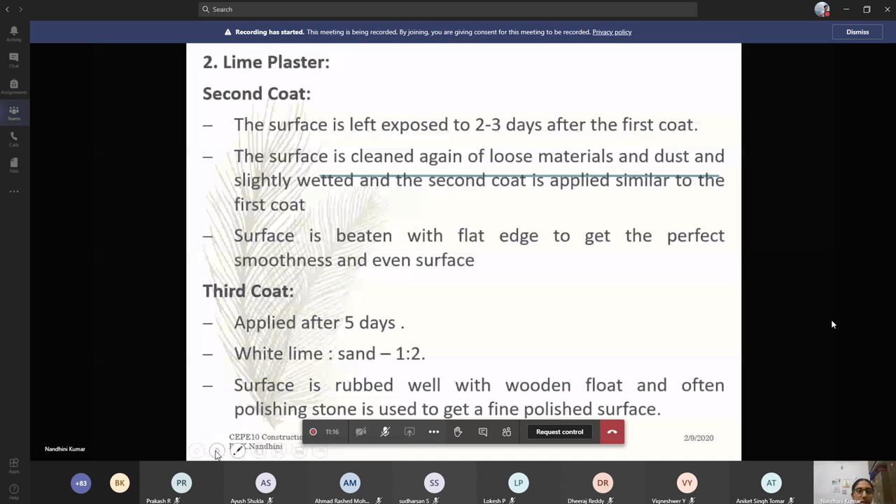Next is the cement plastering and cement lime plastering. For cement plastering, generally two coats are provided. This is generally used in low cost building materials - for low cost, you go only for a single coat.

The types of plaster finishes - you might have seen your bedrooms are a little smoother, and the external is a little rough. Did you all check it in your house? Did anyone check? Yes ma'am, how was it? Was it all the same? Yes ma'am, they were quite the same. Did anyone find any difference?

Outside was rough, ma'am, the outside was rough, the inside was very smooth. We'll see the reason for that in the upcoming slides.

This is the smooth cast plaster finish. In this finish, the surface will be very smooth and soft. The mortar for this finish may be made up of cement and fine sand - since you need a very fine coating, you'll use cement as the particle size is very less, and also very fine sand. The mortar is applied with the help of the wooden float.

With the help of the wooden float, you'll have a rectangular type wooden float that the mason will be holding, taking it to the top and bottom to make it into a smooth finish.

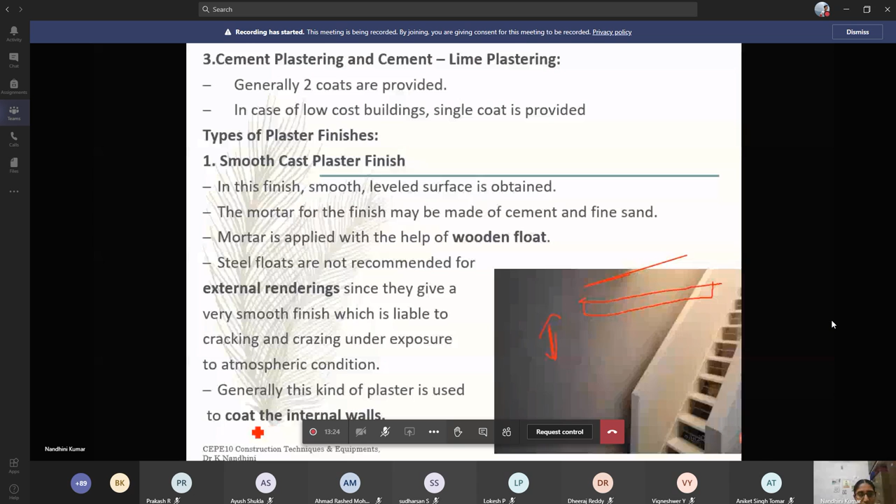Generally, this kind of plaster is used to coat the internal walls. Rough plaster finishing - this plaster is a mixture of sand and gravel, which is covered on the freshly plastered surfaces. This is rough cast plaster. Have you seen this type in any newly constructed buildings?

This is also known as Spartan dash finish, a very rough finish. This will be provided mostly in industrial exposed buildings or heavy structures where heavy handling of equipment or industrial or factory related activities are done. For that, the outer or inner plastering will be very rough.

Mortar used to get the rough cast finish consists of coarse aggregate, minimum 3 to 12 mm size, along with cement and sand. The proportion of one part coarse aggregate, 1.5 parts cement, and 3 parts sand is mixed, and that is applied.

A large quantity of mortar is taken using the trowel. You mix the mortar, take it with the trowel, and then dash it against the wall. It gets stuck to it, and then you level it using a wooden float.

Generally, this type of plaster finish is preferred for external renderings, that is the external portion of your building, because it is waterproof, durable, and resistant to cracking.

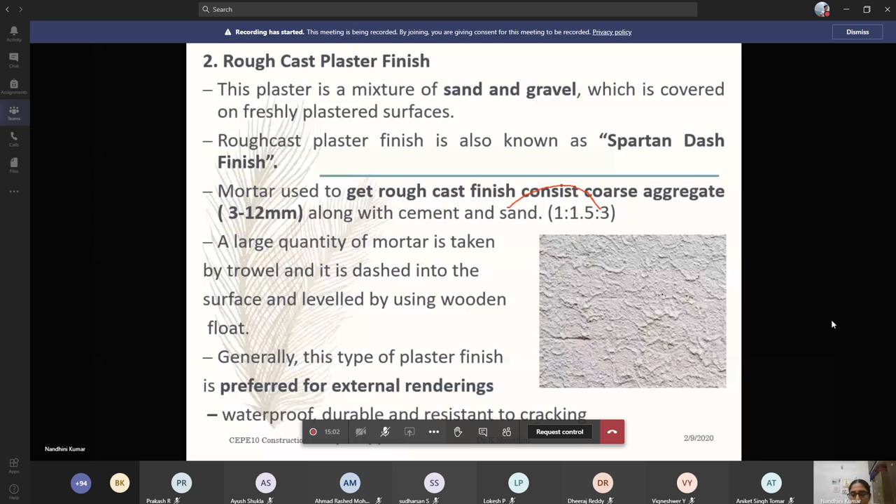Sand-faced plaster finish. Have you seen this type in the internal walls? When people are constructing internal walls, smooth sand and cement slurry will be used for this mortar.

Sand-faced plaster is a layer of cement sand mortar applied on the brickwork, and it also serves as a damp-proof coat. The main purpose is damp-proofing, so water should not penetrate into it. That is the reason. If it is closely packed, then water will not penetrate through it.

This type of plaster is used to give a finishing touch to the surface on the walls, like your internal walls, or any part of the building, maybe rooms or partition walls. Over this, you can coat it with many colors, or that is left up to you, for the outer plastering and preliminary coatings.

To some extent, they serve as sound and thermal insulation material. A sponge is used on the second coat when it is wet, to remove the extra dust, before going for the outer coating of paint, like sand grain, making the surface equal and uniform.

These plasters are used to reduce cracking and crazing. You might have seen what cracking is - that will generally develop. And there is crazing too, which I'll show you in the image.

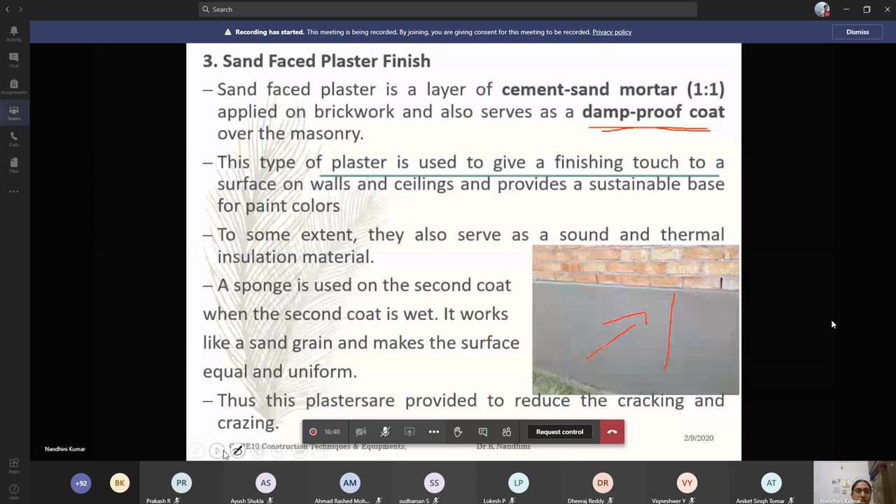This is a textured plaster finish. You might have seen this in many resorts, or nowadays people constructing villas provide these external textured walls. People are preferring to go for textured walls instead of normal walls.

Have you ever seen this texture? There will be so many undulations. If you keep your hand on it, you can feel that it is not even.

People have started moving on to this because they wanted some uniqueness for their building. If there are 200, 300 rows of houses in a building, they wanted to easily provide some aesthetic view to their building. They want a simple uniqueness, to be a little unique among others, to show some extra things, so they have moved on to this textured finish.

Textured plaster finish can be created with different tools on the final coat. There are some pointed brushes available. Once the coating is done, they grab it, rub it, and remove the extra things. They finish it with the coat, scrub it again, and remove the extra material.

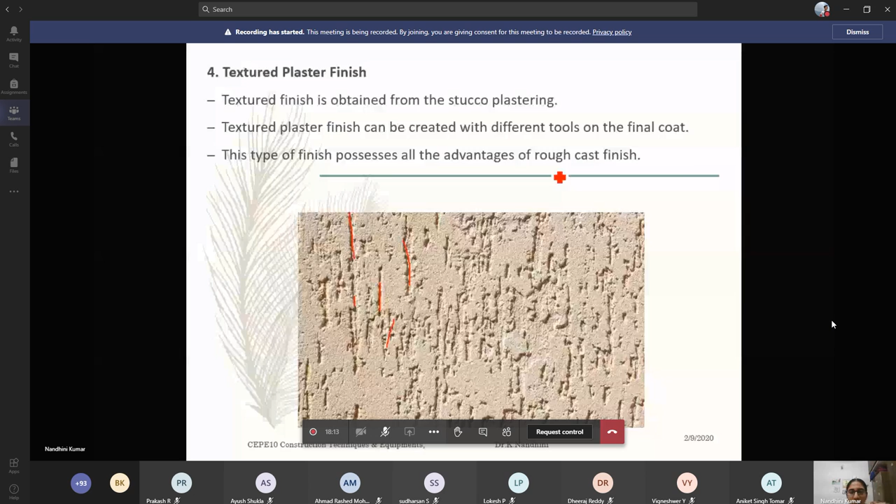Next is pebble dash. You might have seen this in beachside resorts or star hotels. This type of finish will be provided in your parking slots or the entrance of the building. You might have seen those things.

Yes. Yeah. Thank you. Yes, ma'am.

Pebble dash plaster is similar to rough cast plaster. This finish is made up of very small pebbles or crushed stones. They prepare the cement slurry, let it dry for a few hours, then dash all those stones against the wall, put it in and rub it, making sure it gets set with the cement slurry.

After it is all set, they remove the cement slurry with a sponge. Then only the exposed area will show the stones. This stones will be exposed, and after pressing, once the cement slurry is cleared, only these stones will be visible.

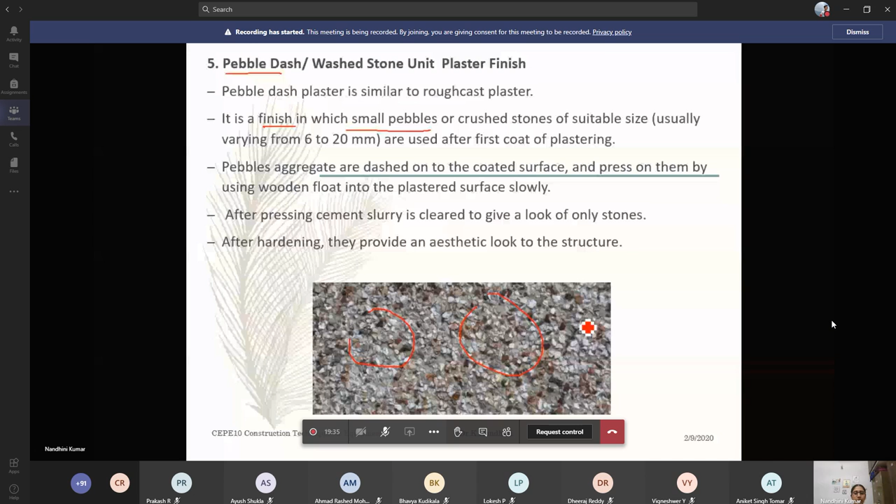After hardening, it provides an aesthetic look to the structure. Once it is all hard, you have different types of colors - dark brown, light gray, light brown, black, everything. In between you will have cement particles too, but from outside only the stones or pebble types will be shown.

Yesterday someone asked what is curing. Curing is like when you see people watering newly constructed structures - it may be a column, a floor slab, the roof, or any material. Once it is made up of concrete, they cure it. Have you seen those things, people curing it, watering it?

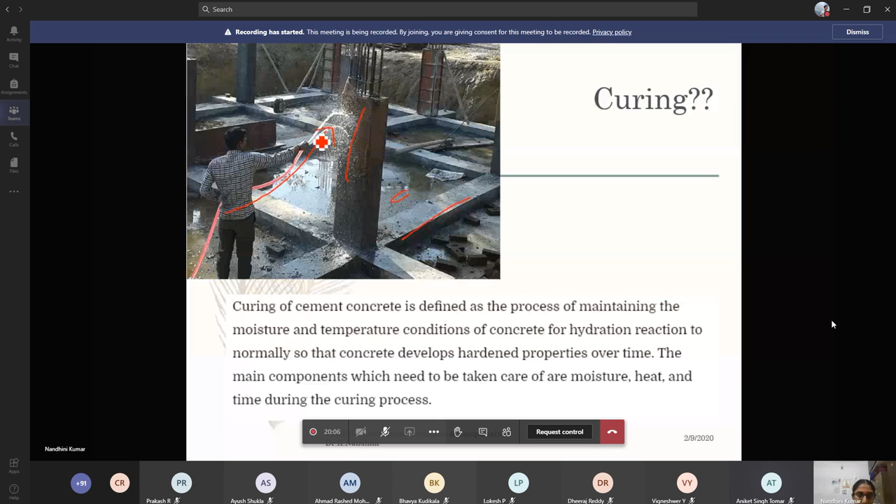Yes ma'am, mason will be standing on top of the room, pouring water with his hose. Yes ma'am. The main purpose of this curing is...

The main purpose of curing is that concrete is made up of cement. Though you use some mixing water for the cement - you have composite materials like cement, water, sand, aggregates - you bind everything using water. Though this is required for the internal process, you need protection from the environment so it doesn't get damaged, or it needs moisture to grow. Curing of cement is defined as the process of maintaining the moisture and temperature conditions of concrete for the hydration reaction.

Normally the concrete develops strength once it is hardened properly. When it is wet, you cannot feel or check the strength. When it is quite hard, at one day it will be better, for 3 days it will be good, and when you take it to 28 days your strength will be quite hard. Meanwhile, the hydration process internally takes place in a faster manner.

The main components that need to be taken care of are moisture, heat, and time. Whenever you go to a site, you can see when people are not curing it properly. In the early age, some 3 to 7 days itself, you might notice a few cracks - that is due to lack of proper curing. If people are not providing proper curing, the structure may start cracking, or exfoliation or spalling of concrete may be observed.

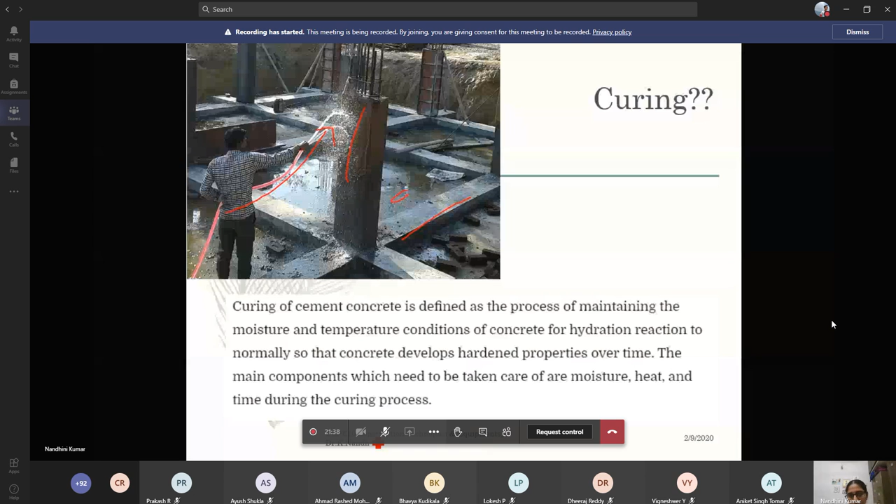That's all, we've finished about plastering. Now we'll see what defects are found in plastering works. The main defect is unevenness - if proper skilled labor is not doing the work, we may see some bubbles over the plastered work. Nowadays professionals are doing it, but before we might see some undulations, some bubbles, and in some places little hole-like things. These are the unevenness in the surface.

Next is rust stains. It may appear on the plaster because of the presence of iron. Some people might have used a rusted tool to plaster it evenly, and that may stick onto the surface and finally show some rust stains.

You might have seen, while doing the plastering work, you let it set for some time, and you might have inserted some provision, or inserted a rod into the building where that also gets stuck to the building. Efflorescence is nothing but the deposit of soluble salts on the surface.

You might have seen some white patches in the building, maybe in your own houses. That is due to improper plastering work. This is due to the presence of unburnt salt in lime, or unburnt sand, or soil that may be used in the bricks. Those things lead to efflorescence.

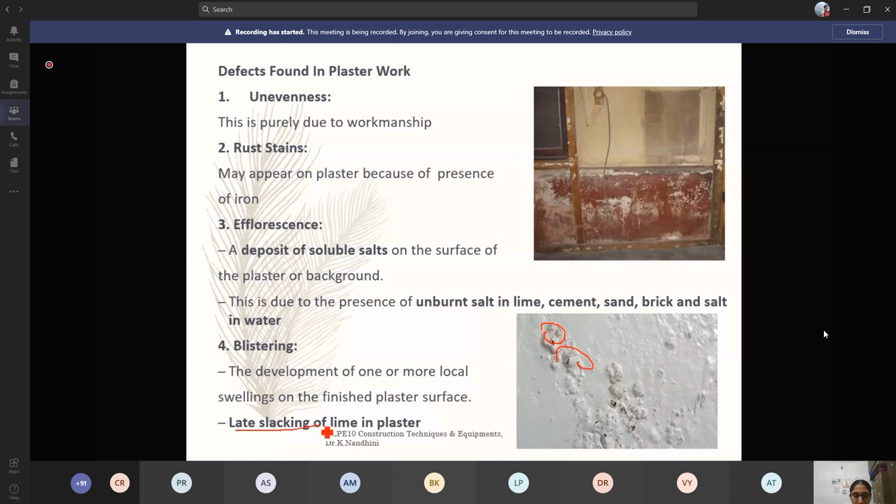Blistering is the development of one or more local swellings - this type of thing is called blistering. This will be observed on the final finished plasters, and this may be due to the reason of late slaking of lime. Do you know what is slaking of lime?

You know what is slaking of lime? All the calcium oxide converts to calcium hydroxide. Yeah, that's true. The simple thing is, when you mix water to the quick lime, it becomes a little slurry-like thing.

It gets hydrated, and that content is called slaking of lime. When it is getting late, lumps or swellings can be observed in your plastering work. So when you have mixed it, you have to immediately paste that to your wall. If you leave it for a while, meanwhile your mason might have gone for a break, and when he is back he'll just mix it and put it. That will cause this type of blistering.

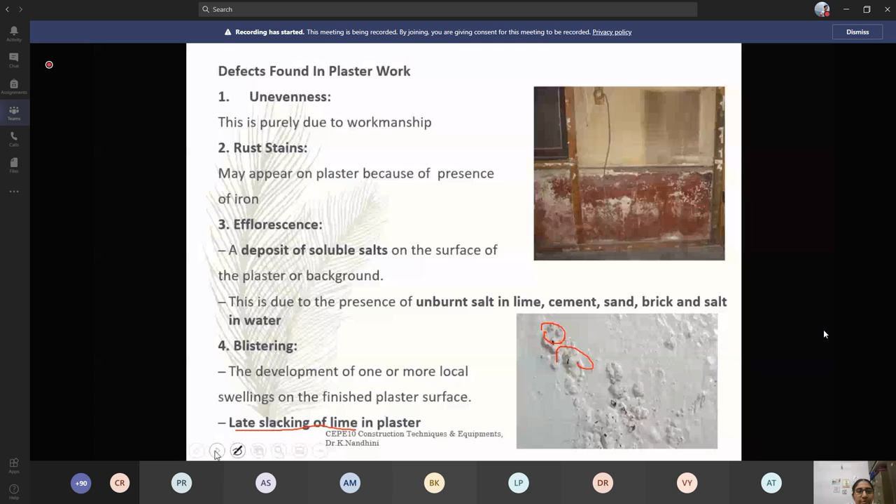And this is cracking. I think you all will be familiar with this. You might have seen in each and every house there will be some cracking. Cracking appears if the surface is not prepared properly.

Movement due to thermal expansion or rapid drying, movement in the plaster itself, excessive shrinkage of plaster - once the materials are exposed to the atmosphere. We have different types of materials to make a wall: brick, cement, plastering works, mortar, sand. All those are different materials, and each has its own shrinking capacity. Once it all shrinks, the surface will be dry, and it will start forming these types of cracks - mild cracks at first, then developing into huge cracks.

What is crazing? We have already crossed this word crazing. Crazing is nothing but the development of fine hair cracks. These may be due to shrinkage or due to temperature exposure.

And flaking and peeling is the scaling away of patches of the plaster surface. Can you see this? I told you yesterday, if there is some exposed area, you can just scratch it and see what is there inside. This is called flaking or peeling of the surface.

It's the scaling away of patches of plastered wall due to lack or loss of adhesion with the previous coat. Like if your house painting is 10 to 15 years old and you want to paint it again, you call some unskilled, locally available professional to paint. What they'll do is just rub the surface and go for the next coating.

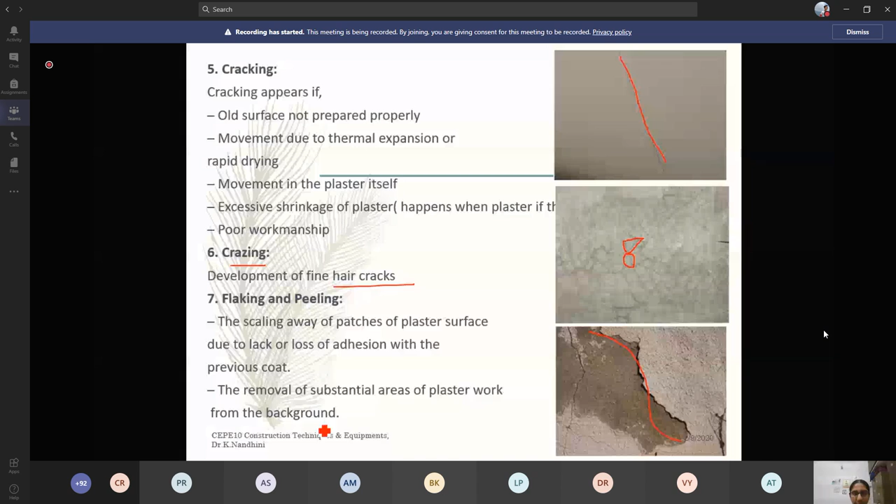This is the removal of substantial areas of plaster work from the background - popping. It is the appearance of conical hollows, popping the backing of the finishing coat of the surface. You may see those types of blistering - it will be a bigger one, or like some bubbles you can find. When the mason is mixing the lime slurry, if not done properly and he just hits the wall, there will be a bubble. You can see that bubble - it will burst, but the impression of the bubble will remain. Those things are also called popping.

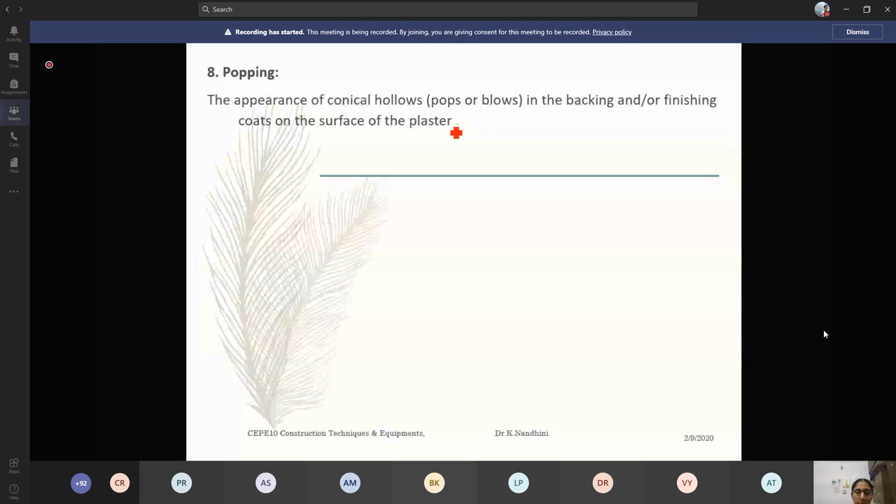We have seen about plastering. Now we'll go to pointing. Any doubts as of now?

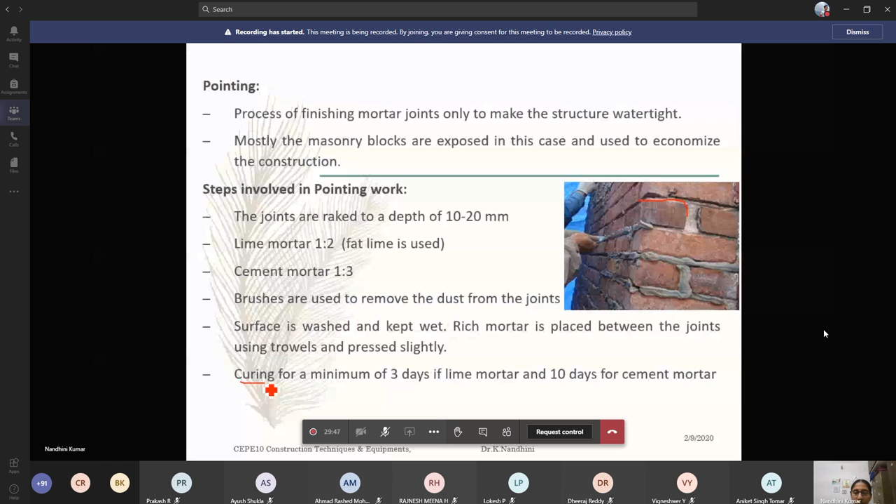You have crossed over this term, curing. You know what is curing. Now we'll see the types of pointing. There are so many types of pointing.

First, we'll see what is flush pointing. This is your external wall, and we are going to pack it completely inside. Mortar is pressed hard in the raked joints and finished off flush with the edge of the masonry units. The edges are neatly trimmed - you put it, stuff it, and then remove the excess using the trowel and the straight edge.

It doesn't give good appearance, but it is more durable because it resists the provision of space. There is no gap provided for any external material, bacteria, or dust to enter, and if it is exposed to rain, there is no provision for air voids to enter. So everything is completely packed. This is the most widely used pointing method, flush pointing.

Next we'll see what is recessed pointing. Here you provide some offset, some gap. Mortar is pressed back, which means this gap should be 5 mm or more from the edges. During placing of mortar, the facing of the pointing is kept vertical using a suitable tool.

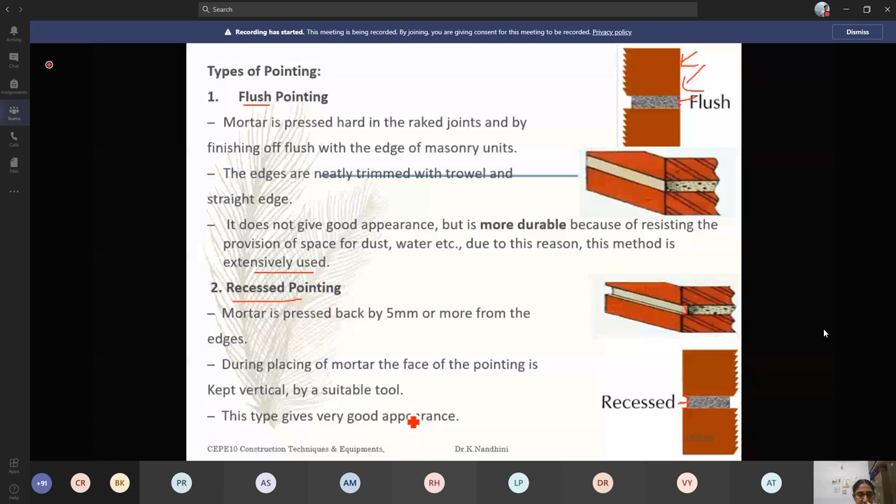This type gives a very good appearance. After finishing that recession of 5 mm or more between the gaps of the bricks, the elevation will be looking good - you'll be able to notice that every brick is highlighted. That gives good appearance.

Next is beaded pointing. You see this is the brick and this is the brick, and in between you have a bead-like structure - it comes like this. This bead-like structure is called beaded pointing. It is formed by a steel or iron tool with a concave edge - you have a template for it, you put the thing, press it, and remove the excess. It gives good appearance, but it will damage easily compared to other types.

It has this shape, and it will be exposed to water, dust, or wind - everything will be exposed easily, so this will be getting damaged.

Next, struck pointing. In this struck pointing, it is similar to flush pointing, provided this is your brick and here is another brick - the thing is it will be in an inclined position. You can see there is some inclination in the placement of the mortar. This is a modification of flush pointing. The face of the pointing is kept inclined with the upper edge pressed inside by about 10 mm, which drains the water easily.

If you keep it this way, providing the inclination like this, the water will get settled here. But when you provide it this way, it will just drain off - the water will drain off in this manner.

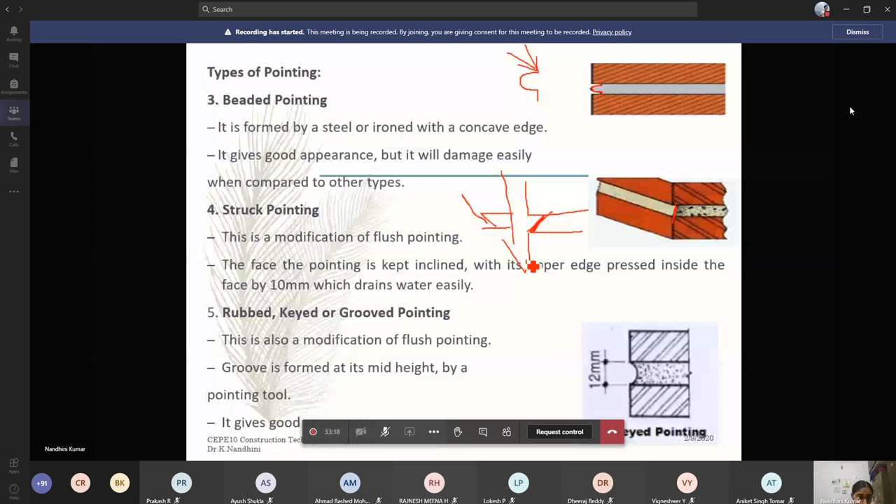Next is rubbed, keyed, or grooved pointing. You know what is grooved - like taking it in this manner, in a curved way. This is also a modification of flush pointing. It is formed at mid height - you calculate the midpoint and cut it in that manner. Pointing tools are available for groove as well as for beading.

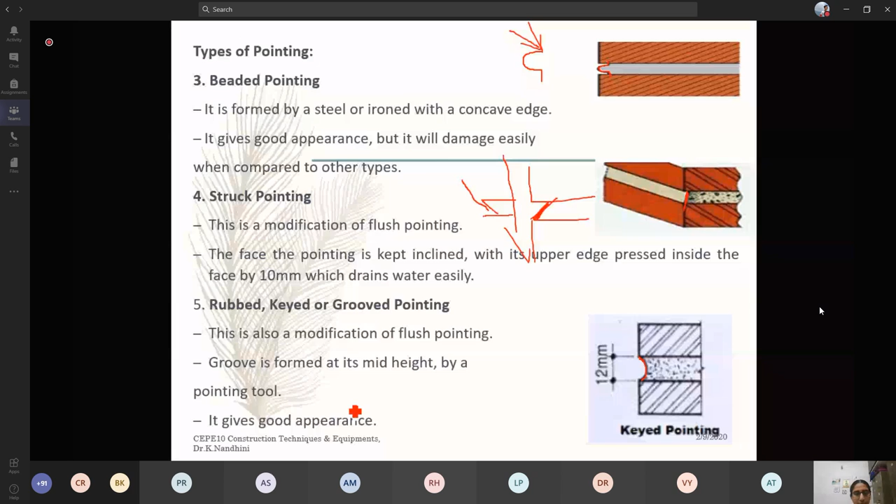It gives good appearance. Next we'll see about tuck pointing. The mortar is pressed in the raked joint first and finished with a flush finish, then a narrow groove is made, about 5 mm by 3 mm in depth.

The width is going to be 5 mm and the depth is going to be 3 mm. You are going to provide such a type of tuck. Providing the tuck is like you're going to push it with the 5 mm width and 3 mm depth. This groove is then filled with the white cement putty, kept projecting beyond the face by 3 mm. Over that, you have the white color cement slurry. The projection is done in mortar.

It is called bastard pointing or half tuck pointing.

We'll see what is V pointing. Can you see? This is V pointing. This is your cement slurry, cement mortar. This is formed by forming a V groove in the flush finishing. You complete everything, then take a groove inside, that is the V-shaped groove. Weathered pointing is made by taking a projection in the form of a V shape. Here you are providing an external V cut. This is called weathered pointing.

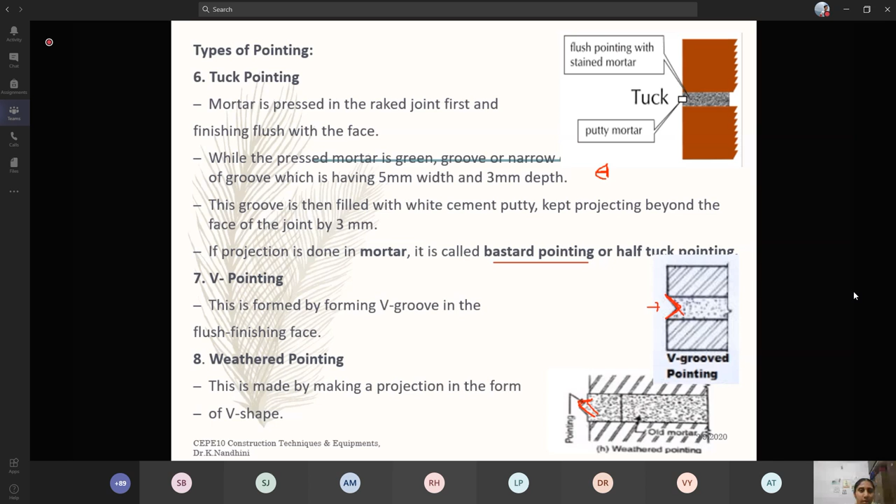Ma'am, are these pointings just for the aesthetic look of the wall, or do we want to add some features to the wall also, like more strength? No, it is only for the external look, that is for the aesthetic view. All these types of pointings can be done. Okay, this doesn't relate to the strength. Yes.

Continuous steel sheets put together to carry out any work for earth excavation, road construction, or metro works. You might have seen this where any proposed bus stand is going to come, or any earth excavation or machinery work is going on, they'll put some steel sheets. The reason is to prevent sliding. Has anyone seen it? Yes ma'am, Chennai Metro. Yeah, in Chennai Metro Rail, you might have seen it. Still now you can see those sheet piles existing.

Sheet piles are sections of sheet materials with interlocking edges that are driven into the ground to provide earth retention, to prevent the earth from falling, and for excavation support. Sheet piles are most commonly made of steel but can also be formed of timber or reinforced concrete. Segments with indented profiles, troughs, interlock to form a wall with alternating indents and outdents. You can see the shape is like this, in a wavy manner. The troughs increase resistance to bending.

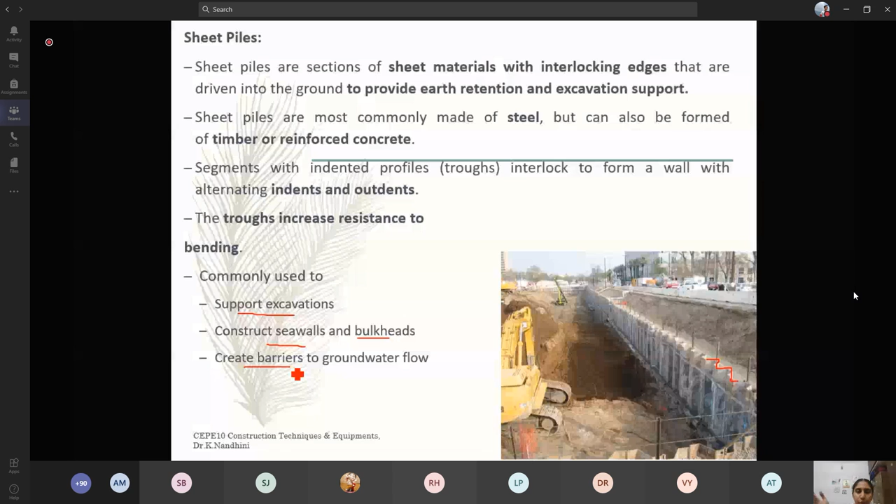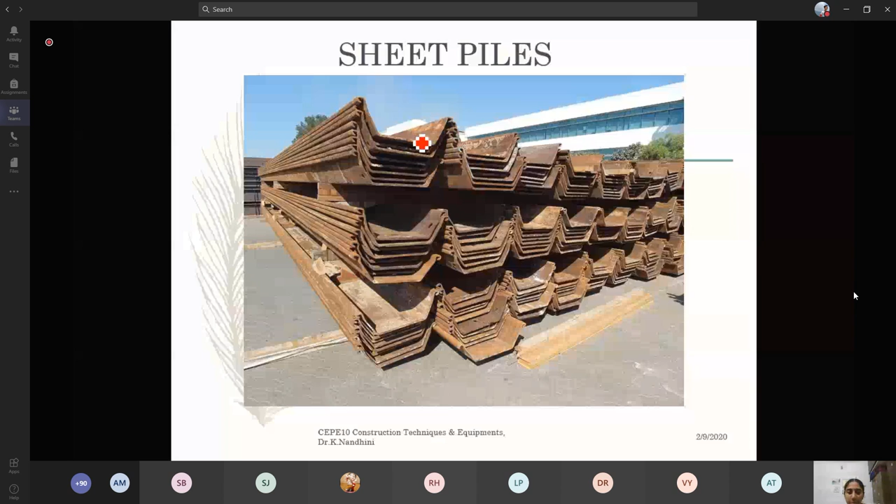These are the sheet piles, you can see downs, ups, downs, ups, downs, up. Sheet pile with lateral support. Initially you place it for a shorter duration, and you need to provide some lateral support when the length is less. If you're going deep, you can place it using machineries, which will be very firmly fixed to the ground.

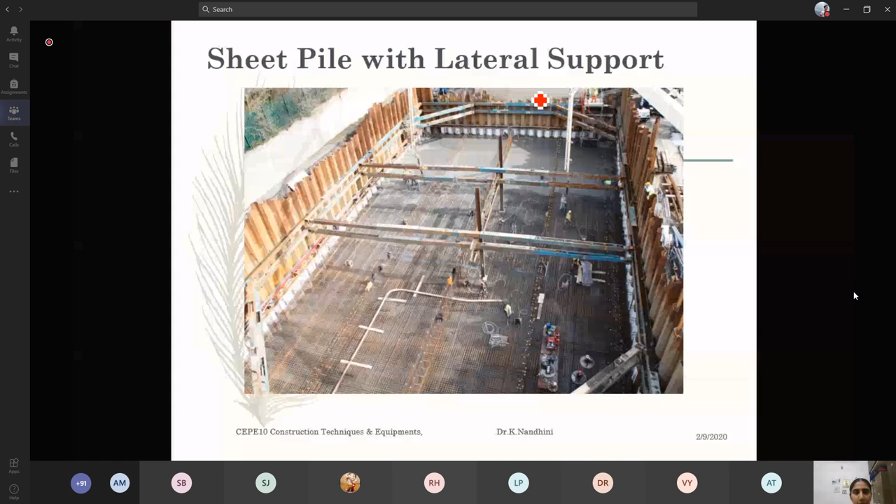That time you will not be requiring any lateral support. Sheet piles, we'll see the properties with the materials. This type of structure, do I have time to continue? Okay, type of structure, we'll compare with wood, reinforced concrete and steel.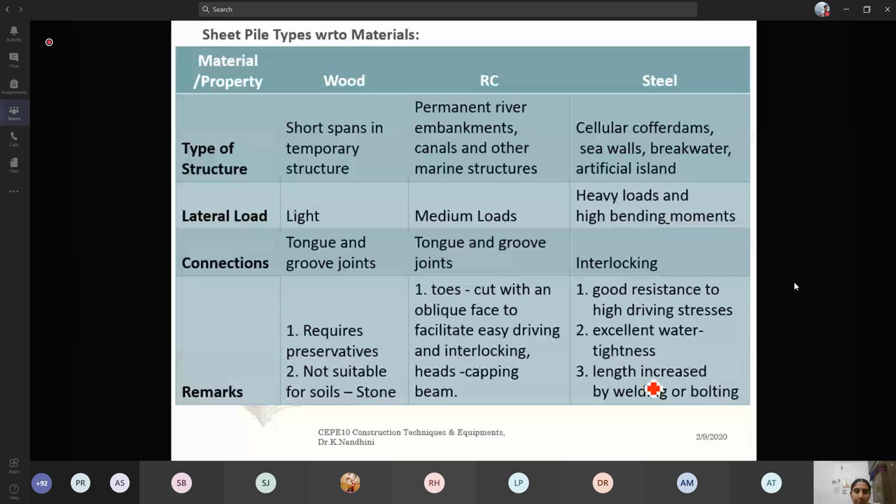Sheet pile installation, we'll see. This is a sequential manner. Sheet piles are installed in a sequence to design the depth along the planned excavation perimeter.

Like once you are done, you have to go, they start their construction initially by covering using the sheet piles. So I've seen so much of this for below grade parking structures, basements, pump houses.

Your voice is breaking. Am I audible? Yes ma'am, your voice is breaking. Am I audible now? My network connectivity is also good. No, am I audible? Yes, yeah ma'am. Shall I continue? Yes ma'am, yes ma'am, yes ma'am. Now you can continue.

Okay, thank you. Sheet pile walls are used to support the excavation for below grade parking structures, that is your basements, pump houses, foundations, to construct cofferdams for offshore constructions, and sea walls and bulkheads. This can be used in your inland as well as in your sea land. Both are useful, it depends upon which region you want to construct, which soil, and how much depth you want.

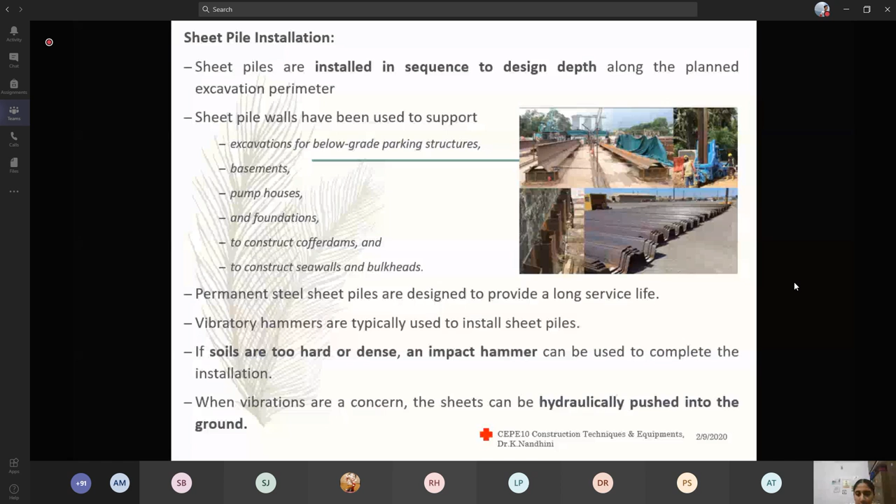Depending upon the depth, you can go for either steel or wooden sheets. Permanent steel sheet piles are designed to provide a long service life. Vibratory hammers are used to install this, you can place it using the vibratory hammers. If soils are too hard or dense, an impact hammer can be used to complete the installation process. When vibrations are concerned, the sheets are hydraulically pushed into the ground.

You'll see a few images. Here you can see with the help of the crane you are able to fix it. Here you can see you are able to push it in, that is insert it into the soil using the machineries. Here you are done on both sides, you can place it exactly between that using the equipments.

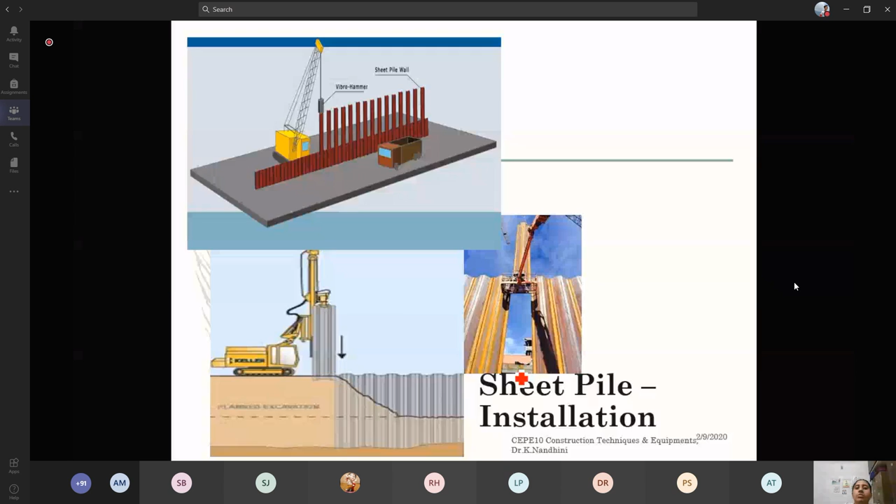Take any locality, starting from the waste disposal area, for bridge construction, for offshore structures, for shore structures, and for normal building structures - for everything you need these steel sheet piles. Can you see this brown shaded area? There are so many types. Let's not go into detail, we'll see what is a sheet pile and what the installation process is, that alone we'll be seeing. A very basic thing.

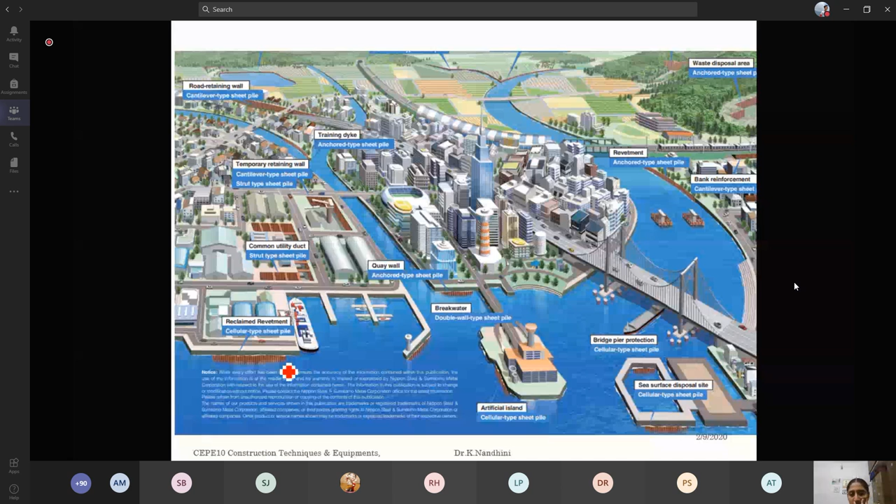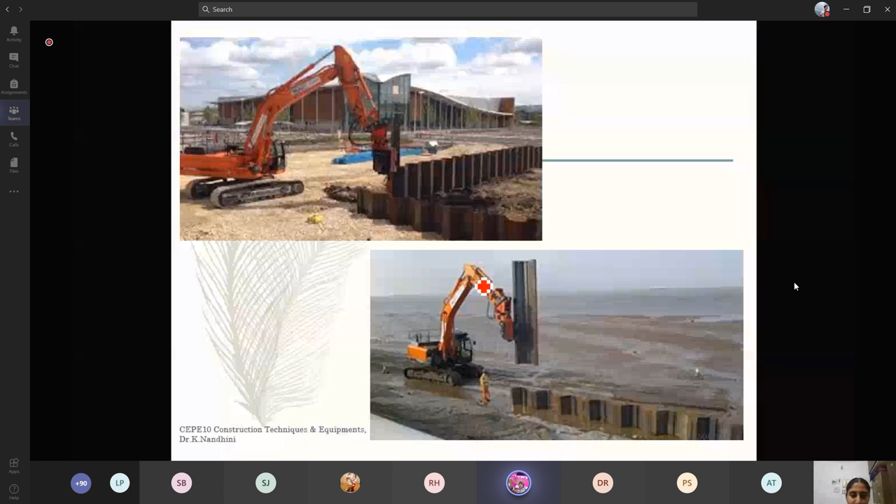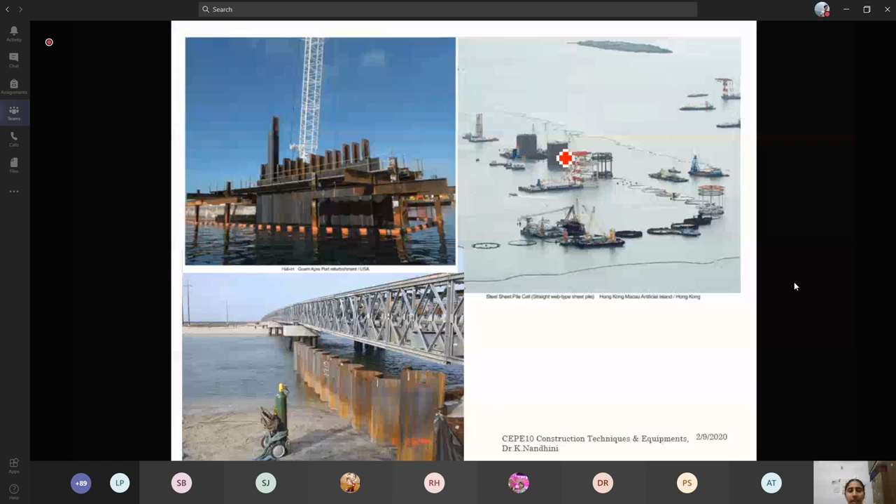I think we'll wind up the class. Can you see how they are installing it? And this is in the seawater, they are installing sheet piles. Installation of sheet piles under seawater. And here these external things are sheet piles. You can see for construction of this bridge pier, you need to externally cover it with sheet piles. Only then can you start your reinforcement works and raise it above.

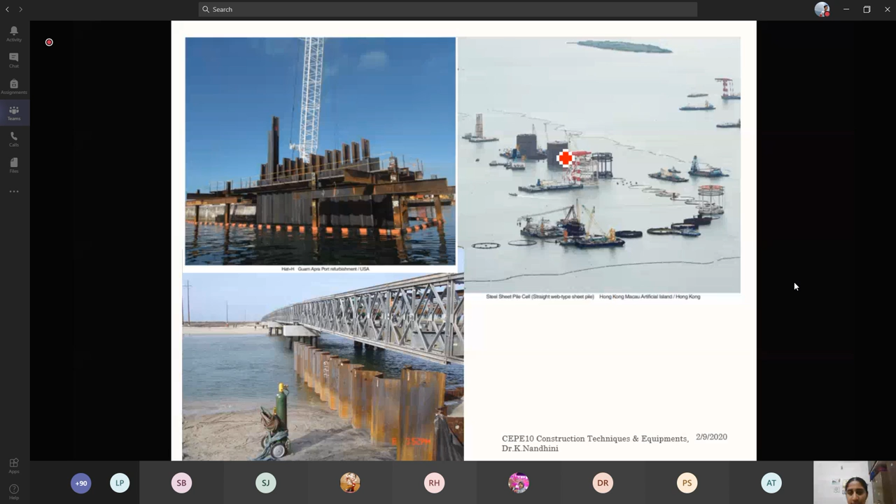Yes. We'll see what is shuttering and centering in the next class. Okay, thank you.